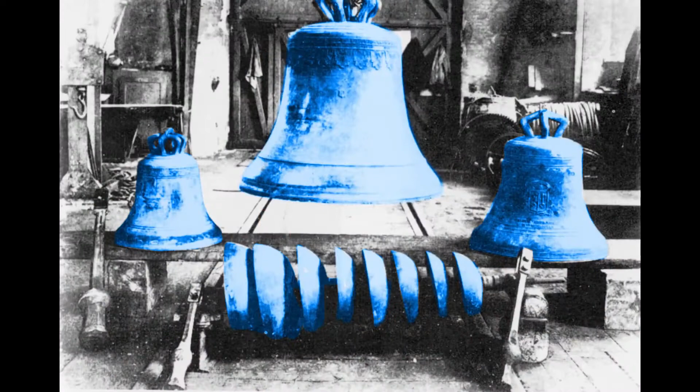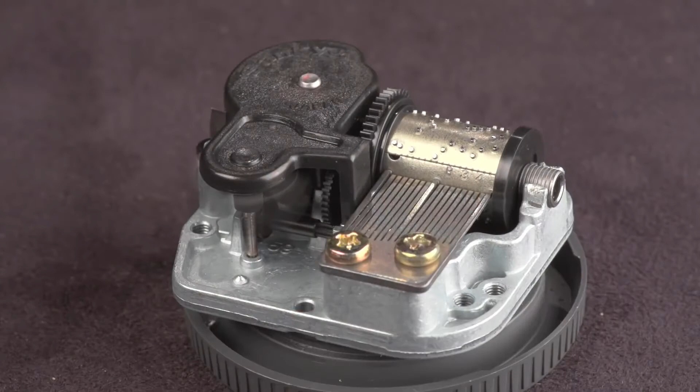Wind it up, and it plays a tune. The melody is programmed on this rotating drum. The drum has protrusions called pins that pluck the teeth of the comb. The comb is a piece of steel with 18 teeth. Each tooth is a note. Longer teeth are lower notes, and shorter teeth are higher notes. The comb works like a multi-pronged tuning fork.

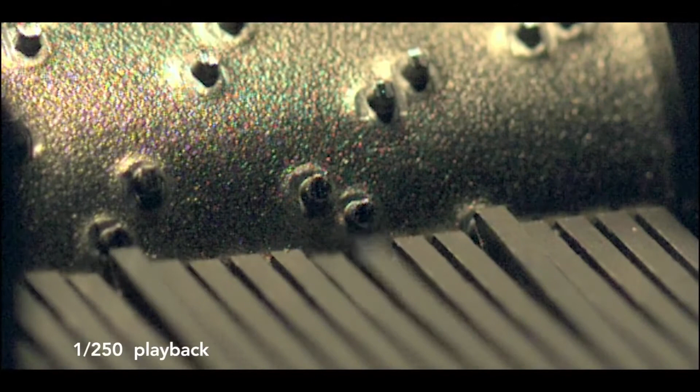In this high-speed video, slowed by 250 times, the drum appears not to move, but you can see the teeth vibrate. The shorter tooth is vibrating faster than this longer one. These vibrations produce the sound.

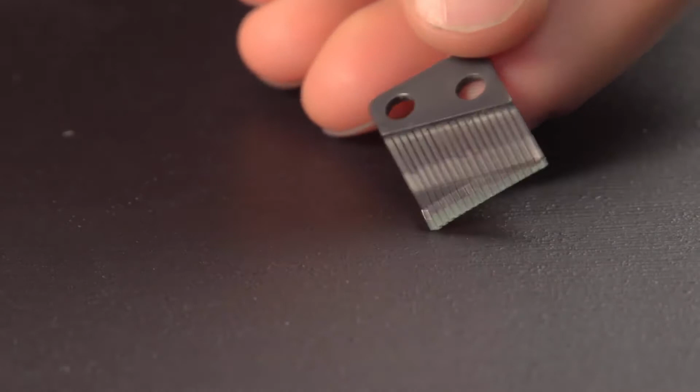The teeth are like this saw blade. When it's longer, it produces a lower note when plucked, and when shorter, it produces a higher note. Notice when you turn the comb over, the teeth don't have the same thickness. The longer teeth, the lower notes, are weighted more on the ends. This added weight lowers their resonant frequency even farther.

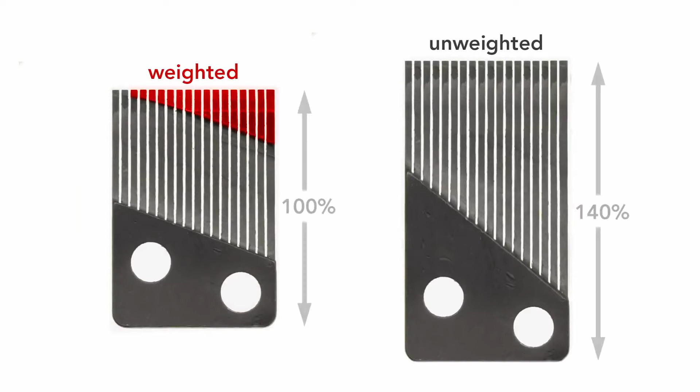Here, I taped a lead weight to the end of the saw blade, and it produces a lower note than without the weight. Because of this weighting, the comb is more compact. For this particular design, if the comb were unweighted, it would have to be roughly 40% longer to produce the same range of frequencies. Another advantage of the weighting is that the combs can be mass manufactured in a single size. You just cut away the proper amount of material to produce a unique set of notes.

For example, although each comb has 18 notes, the specific notes vary for a particular song. Here's a music box playing London Bridge with a comb specifically designed for this melody.

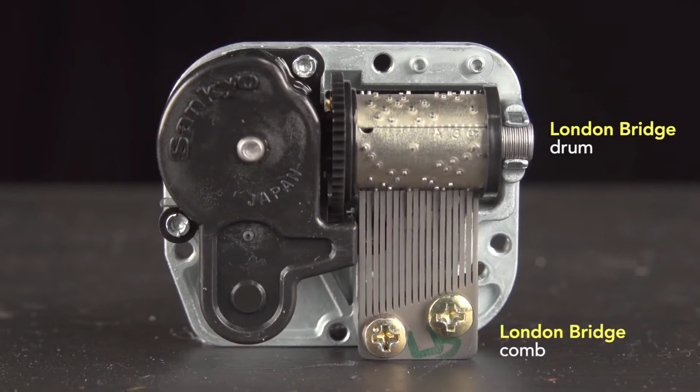And now here it is with a comb cut for a different melody, This Old Man. The timing is the same, but the notes are different, and it sounds odd. The difference in weighting is so subtle that these two combs are indistinguishable by eye.

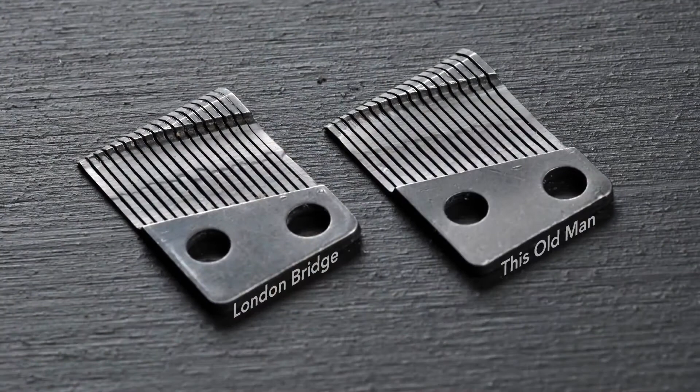Inside the casing of the music box is a clock spring. It's a coiled strip of steel that is 40 centimeters long, unwound. The outer end of the spring has a T-shape which affixes to the casing of the music box and so holds it in place. The inner end of the spring has a slot.

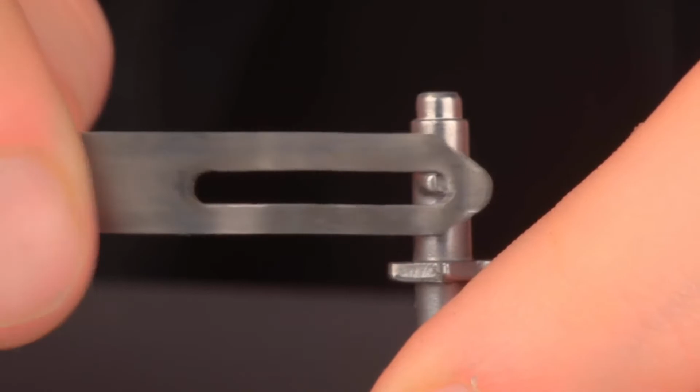This slot hooks into a notch on a metal shaft. This shaft is attached to the winding key. The shaft also has an angled 6-tooth ratchet gear. This gear fits inside this larger plastic gear. On the inside, there are 4 flexible pawls so the axle turns independently from the plastic gear.

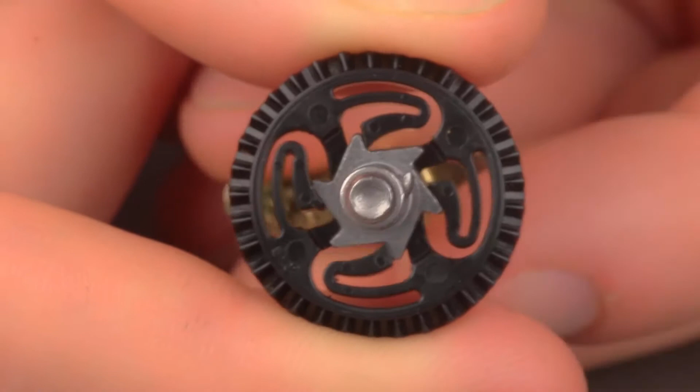This happens when the music box is wound. When the spring unwinds, the axle turns in the opposite direction and the 6-tooth gear catches the pawls, which rotates the larger plastic gear with it. This rotation drives the music box. As the spring unwinds, it rotates this bevel gear, which engages a second bevel gear affixed to the drum.

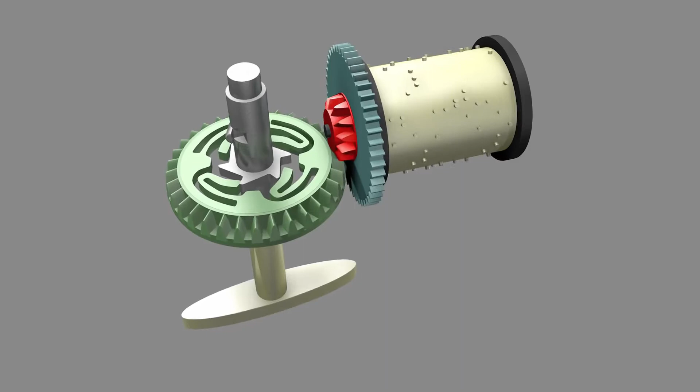But there's a problem with this setup. The spring will unwind quickly and the music will play too fast. This piece, called the governor, solves this problem. It's connected to the drum by a gear train. The gear train is compactly built into the music box.

The rotation of the governor controls the speed. Stop the governor and the drum stops. The governor uses air resistance to control the release of the energy from the spring. Air resistance is proportional to the velocity squared of the object.

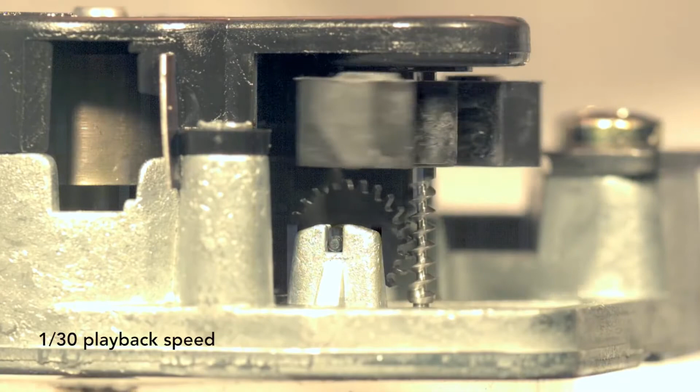When started from rest, the governor encounters little resistance and speeds up readily, but when it spins rapidly, over 3,000 revolutions per minute, air resistance swiftly increases, which prevents it from moving much faster. This action limits the speed of the governor and limits the rotational speed of the drum.

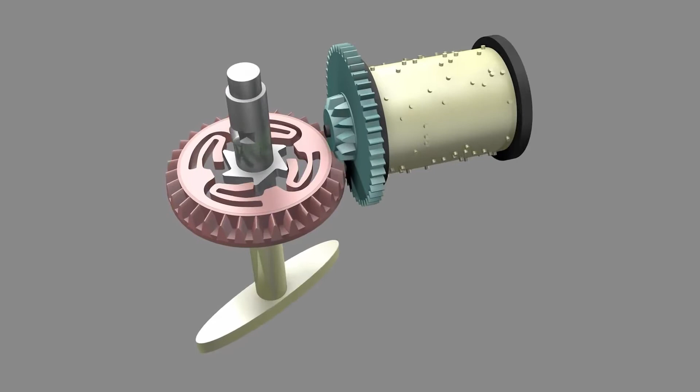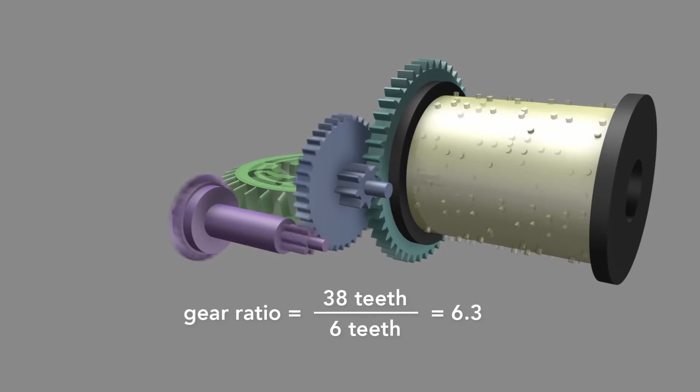To spin the governor so fast, the music box uses a multiplying gear train. It starts with the bevel gear driven by a spring, which engages a smaller gear on the drum. This multiplies the rotational rate by the ratio of teeth on the larger gear to the smaller gear, here 2.75 times. The drum is also affixed to a larger gear, which engages another smaller gear, multiplying the rotational speed by 5.75 times. The larger gear on this piece engages the smaller end of another spur gear, further multiplying the rate by 6.3 times. Lastly, this spur gear engages a worm screw on the shaft of the governor.

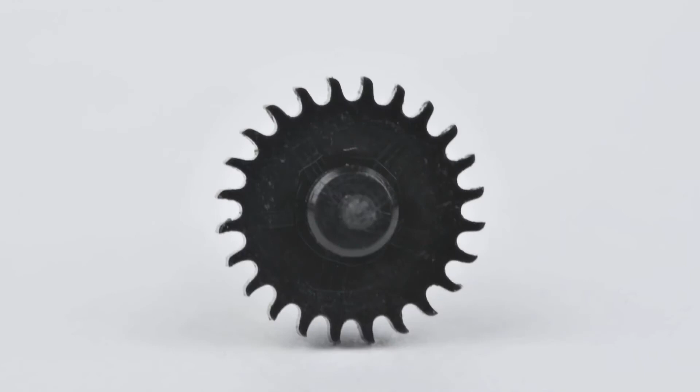It moves so fast it's blurred. Here, slowed down by a factor of 30, the movement is visible. The gear that engages the worm screw differs from the other gears. It has curved teeth, and the shape of these teeth allows it to better engage the screw.

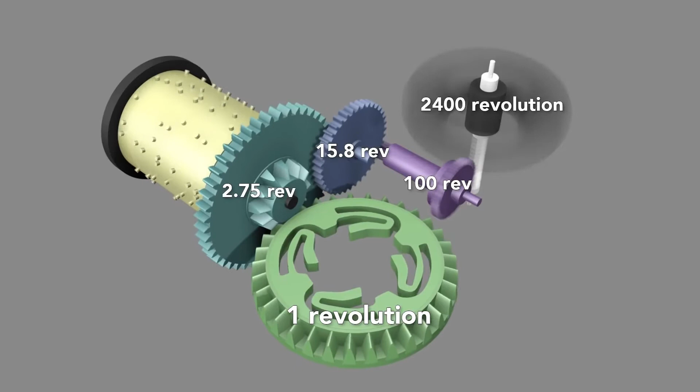The worm screw turns once for every tooth on the gear, and since there are 24 teeth, it multiplies the rotational rate by 24 times. This means that for every single revolution of the first bevel gear, the governor rotates 2,400 times. Since the first gear rotates roughly 1.5 times a minute, the governor spins at 3,600 revolutions per minute.

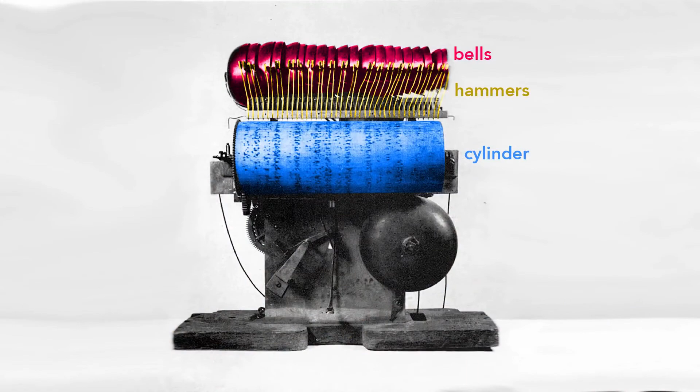As I noted, this music box evolved from devices that used bells struck by hammers. The replacement of these bells with a comb was the technical breakthrough that catalyzed a music box industry that blossomed in the 19th century. The compact comb movements were built into snuff boxes, clocks, and large pieces of furniture. As the industry flourished, music boxes grew more complex. Some, for example, sported dual barrels and combs, which played simultaneously to produce rich harmonies.

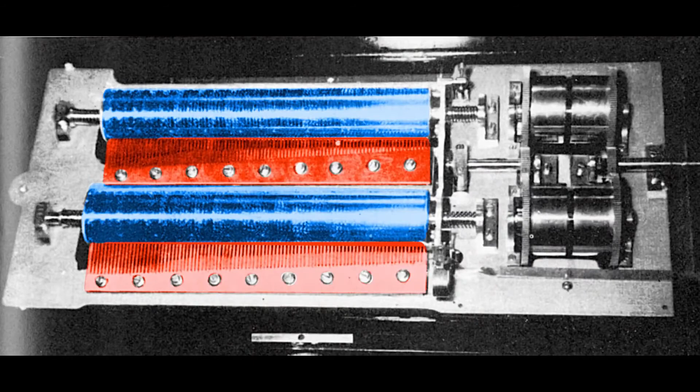These modern music boxes, then, are a charming vestige of a past filled with brilliant engineering and craftsmanship. One last thing: if you hold a music box in your hand, it's not very loud.

But if you place it on a hollow container, it's much louder and richer. The vibrations of the comb are transferred through the metal base into the container where they resonate. This resonance amplifies the sound.

Also, if you rest the music box gently against your teeth, the music will resonate inside your skull. So, the next time you listen to a music box, appreciate its sound, but also think of the centuries of innovation and design that led to it.

I'm Bill Hammack, the Engineer Guy.